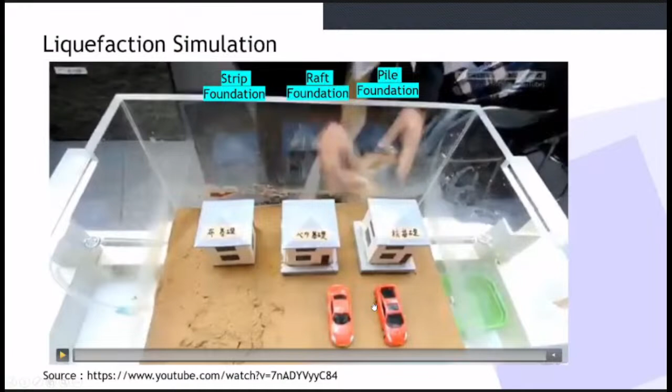So in this video, there is an experiment, a simulation of liquefaction made by a professor in Japan. Here he made three simple house models: a house built above a strip foundation, a raft foundation, and a pile foundation. Then during this experiment, he will shake the soil. This is loose granular soil that is saturated. Then he simulates the earthquake.

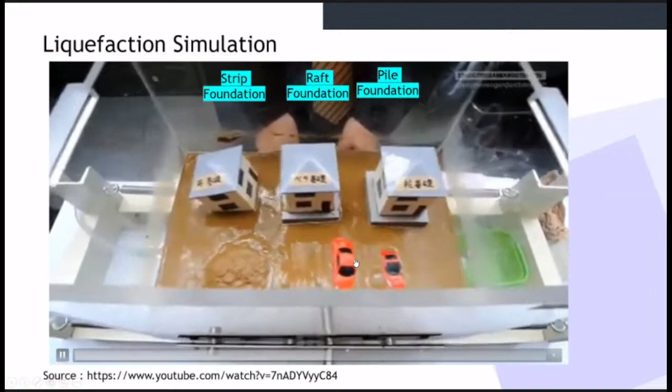As you can see, at the beginning of the earthquake it seems like nothing happened. It's okay, but suddenly at some point when the earthquake is strong enough, the soil will suddenly liquefy, and some of the objects can sink into the ground like this. And for the house that is not properly built with a strong foundation, damage will occur in the house like this. This is the phenomenon known as liquefaction.

Then when the water comes out, the granular particles will rearrange themselves to a denser state like this. So the granular soil, when an earthquake happens, will get loose first, and then it will get closer together. So there will be some settlement at the surface and water will flow to the surface. Liquefaction can be identified in several forms.

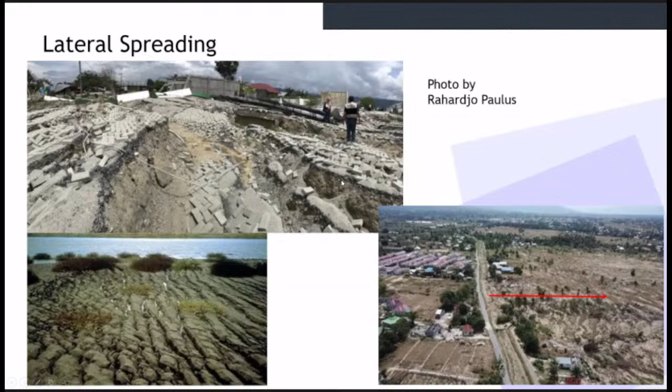And also in sloped areas, when liquefaction happens, it could cause something like lateral spreading like this, or flow liquefaction like what happened in Palu Donggala.

So after we talk about what liquefaction is, when we have a project, whether it's a structural or infrastructure project, we need to evaluate our project. Then from certain criteria, we can determine whether this soil is prone to liquefaction or whether the soil is not liquefiable during the earthquake. There are 4 criteria that need to be fulfilled in order for us to say that this soil is liquefiable. If one of these criteria is not met, then the soil is not liquefiable.

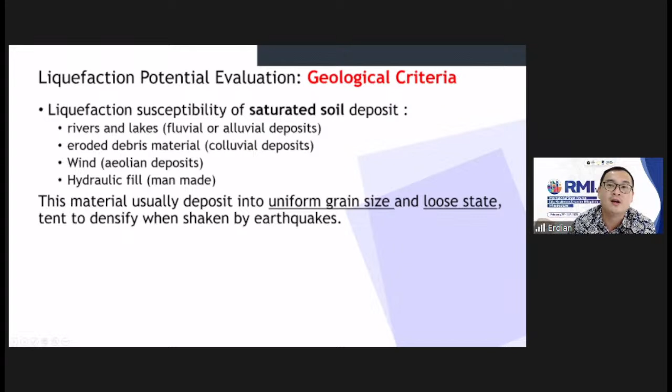With this method, when we check the filling point, the filling point will tend to have a larger particle size, because during hydraulic fill, the large particles are heavy so they deposit first, and the smallest particles flow away. So with hydraulic fill, usually we first have a uniform grain size, because particles of the same size deposit around the same area, and then the soil deposits in a loose state, because when it deposits it has water in it and it is not compacted. So this type of soil fulfills the geological criteria for being prone to liquefaction.

The third criteria is the compositional criteria. From this, we can plot the grain size distribution of our soil to check whether it's within the boundary of most liquefiable soil or within the boundary of potentially liquefiable soil. Usually when people talk about liquefaction, they say that only sand, saturated sand, will liquefy.

However, if we check these compositional criteria, we can say that actually silt also is liquefiable. So when we have a saturated silt in the project, we need to be careful and find whether the silt is really prone to liquefaction or not.

And the last criteria, the one we will talk about most, is the state criteria. This is one of the criteria that we can modify, we can engineer it, so we can design something to make our project not liquefiable. In the state criteria, basically it's like this. There are two things we need to check during an earthquake.

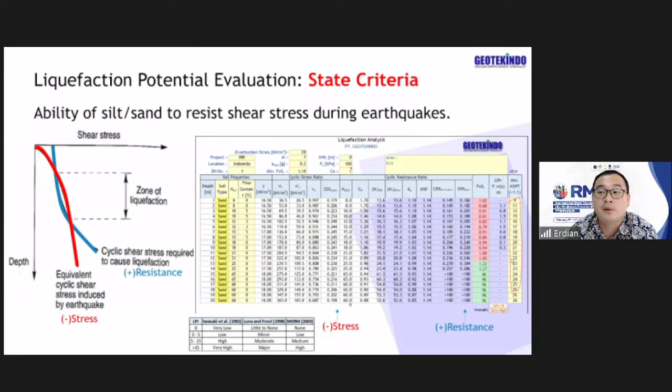So after discussing the CRR, we will jump into soil improvement now. Soil improvement for liquefaction mitigation can be categorized into three criteria. First, we can increase the soil resistance, so we are increasing the CRR. Or we can reduce the earthquake cyclic stress ratio. So when the earthquake comes, we try to absorb some of the earthquake force, so what is transferred to the soil will be reduced. So we reduce the CSR.

And third, we can provide drainage, so when liquefaction happens, the excess pore water pressure will have a place to dissipate. For example, we make a drain or a stone column to let the excess pore water pressure be released.

There are quite a lot of soil improvement methods, but today we will first focus on the compaction method. In the compaction method, we increase the resistance of soil, so we make our soil stiffer and able to resist more stress during an earthquake. Or we can create something underground like grouting or mixing, so we try to absorb some of the earthquake stress into the mixing material, or we can do some inclusion.

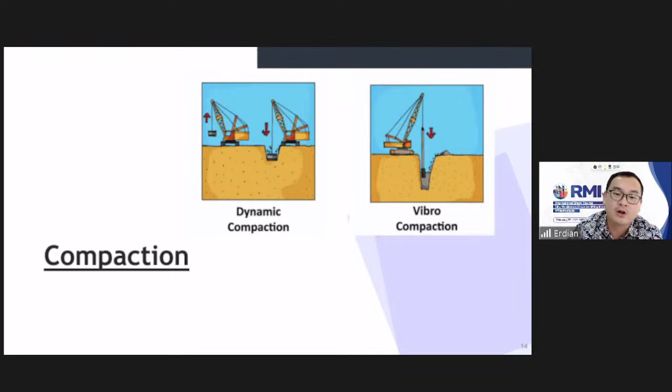First, I want to share about dynamic compaction. So in the compaction method of soil improvement, we have two options to compact the loose granular material. First is with dynamic compaction, and second is with vibro compaction. So in dynamic compaction, what we do is basically like this illustration. We will drop a hammer or a tamper with a certain weight at a certain height. We can calculate it first. Then we will try to compact the soil by dropping the weight like this, by impacting the loose granular soil.

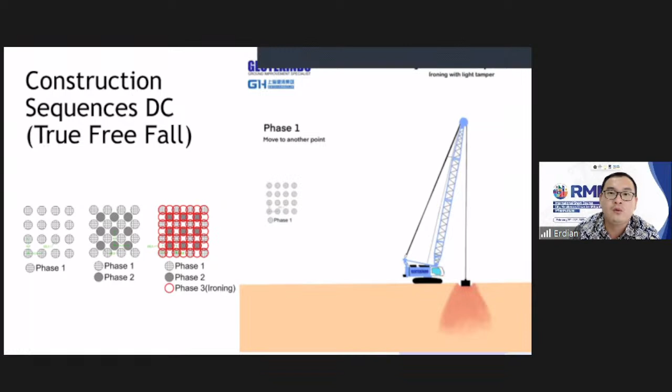Usually this method is very effective when the treatment depth is less than 6 meters. Dynamic compaction has a depth limitation because when we do the tamping like this, the energy will be dissipated. So with a certain height and weight, we can only improve the soil until a certain depth. And in Indonesia, for now, it looks like the effective way is just to improve until 6 or 8 meters with dynamic compaction. If it's more than 6 meters, then we're going to need another method called vibro compaction.

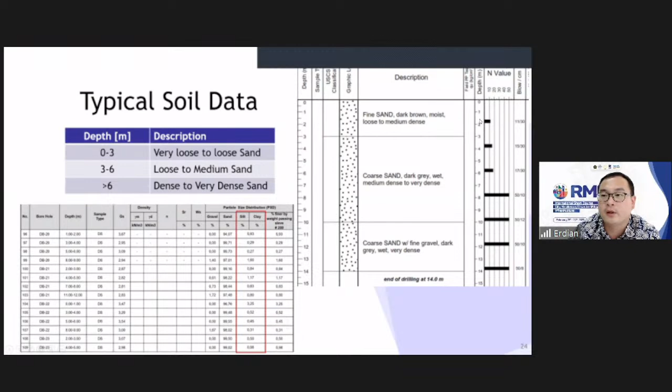This is the photo from the Yogyakarta International Airport project where we did the dynamic compaction. At this project, the soil is a loose sand that is very clean, with a fines content less than 6. So it's very suitable for dynamic compaction, and the loose soil is only at the top 6 meters.

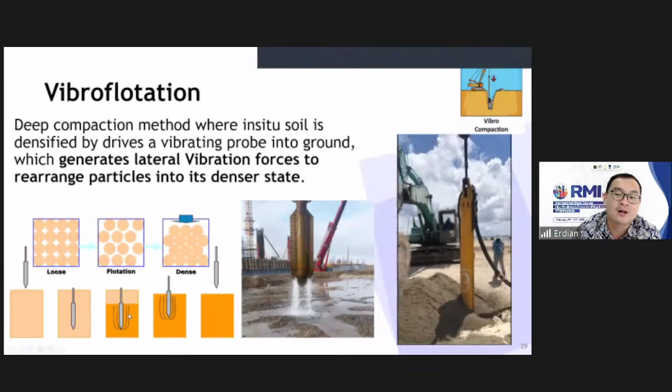Basically, the vibro flotation method is like this. We have a vibrating tube with water jetting. We will try to vibrate the loose granular material to make it compact. What we do here is actually like creating a small and controlled liquefaction. We try to vibrate the granular material. We are jetting some water to increase the excess pore water pressure. So when we lift the probe, it will be compacted. This method can improve soil with depth more than 6 meters, obviously.

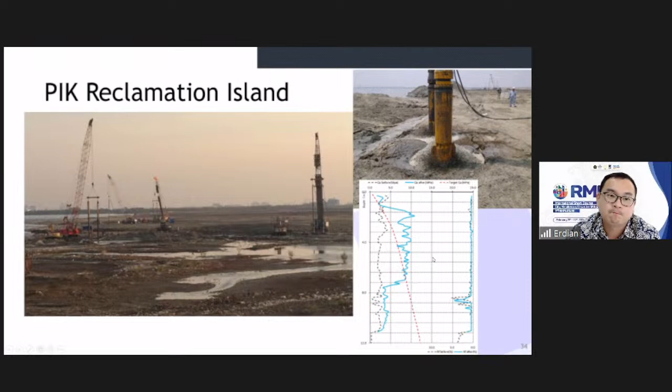This is some photo of our project using the vibro flotation method. Same with the dynamic compaction, usually they will calculate first the minimum criteria for the qc and SPT. Before we do the improvement, we will check with the CPT, and after improvement, we will check also with another CPT. One of the projects using this method is the extension of the apron in Ngurah Rai International Airport.

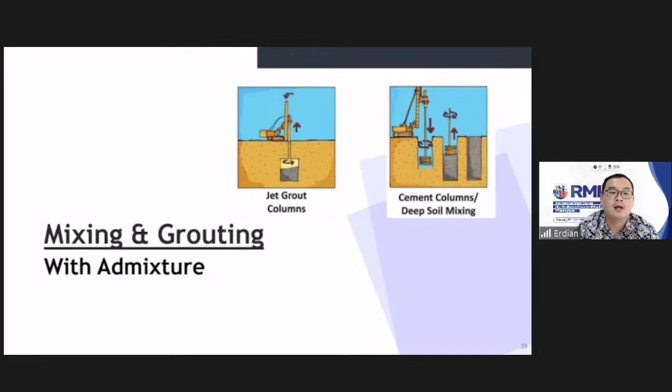Okay, the next method we want to share here is mixing and grouting. So when liquefaction happens, we can try to absorb the shear stress by creating something underground. That something can be in the form of piles or in the form of deep mixing in this case. Deep mixing can be created with a mechanical auger. We call it deep cement mixing or deep soil mixing. Or we can mix the soil using jetting power. Usually this method is called jet grouting. This is a more common and typical method, maybe well known.

For the deep cement mixing, we can create a lot of patterns because of the installation method. And the most typical pattern for liquefaction mitigation is the box, because when we confine the loose granular material in a box, when liquefaction happens, the soil will be trapped inside this box, and the liquefaction will be easier to control.

Okay, deep mixing method is constructed like this. Basically, we will have an equipment with a mixing auger underneath, and we will mix the soil with the auger. First, we blend the in situ soil, and then when it reaches penetration depth, we pump a cement slurry. Then we mix it while pulling up the auger.

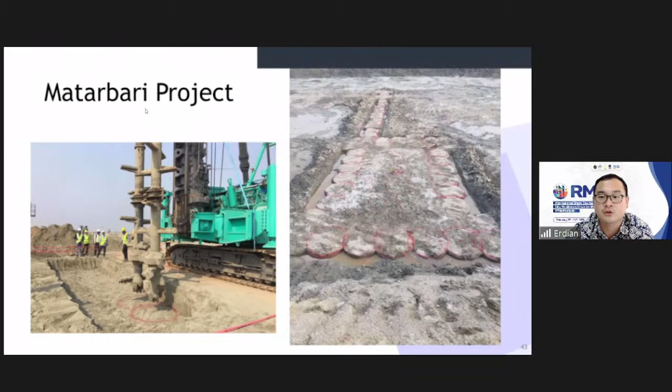And this is the arrangement of deep cement mixing. They have tried to calculate and design several patterns, and to optimize the design in the middle part where they didn't need much force, they can make the replacement ratio less.

Okay, when we are designing for liquefaction using the reduction of CSR method, with the same analysis we can specify and design our pile, then determine the shear modulus of our material. Then from here, there is a formula from Baez. We can calculate the new CSR value. Basically, the new CSR value will be less than the previous value. Then after that, we can determine the new factor of safety.

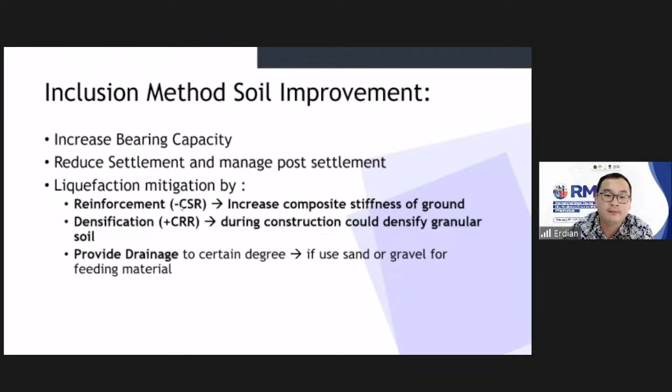Okay, in inclusion method, to create stone column, we have a lot of options and construction methods. Here I highlight some methods suitable for a project with liquefaction. For example, vibro replacement. This is actually the same equipment as the vibro flotation I showed earlier. However, during installation, we feed gravel from above. When we vibrate, the gravel will be compacted, and at the end of construction we will have a stone column. This is the vibro replacement method to create stone column.

Or we can do the compaction column, where there is a top mounted vibrator. In this method, we compact the stone column by vibrating it up and down, like a driven pile. Basically, we push down the stone column. This will also create vibration, and the soil between stone columns will also be compacted.

And the last method is called deep dynamic compaction. The equipment is almost the same as dynamic compaction. However, when we do the tamping, we build a well. We fill it with gravel, then we compact by dropping a hammer into the well.

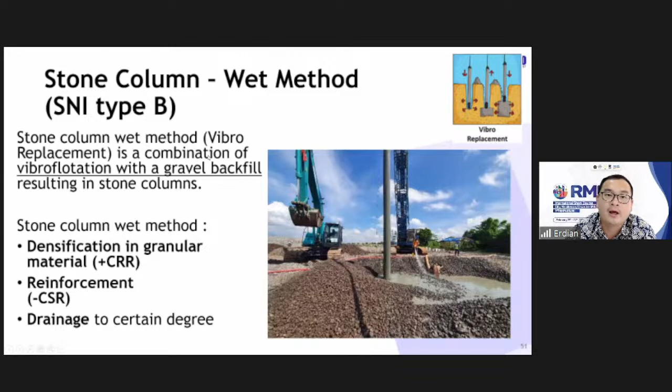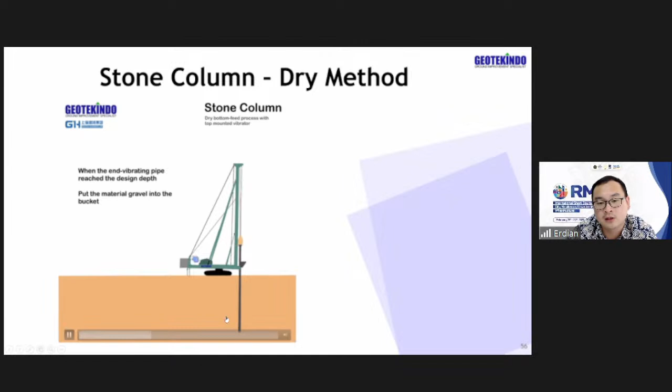Then during the installation, it will look like this. This is the vibro hammer. At the end, it has a one-way valve, meaning that when we do the penetration with this tube, the soil cannot get in. However, when we lift the probe, the gravel will discharge from the end of this tube. So first we will vibrate and insert the tube. During the installation, the area around the stone column will also be vibrated and compacted.

Then we will fill the gravel into the tube. Then when we pull out the tube, some of the gravel will be discharged, and then we can repenetrate the stone column to make the gravel compacted. Then we can repeat this step over and over again until we reach the design depth. This is the dry method stone column. One of our projects that is using this is in Doho Kediri. Yeah, this is the stone column.

Or in the Soekarno-Hatta International Airport, we also have stone columns there for the sand layer at the top part, 8 meters. I want to show here one of our trial installations in Soekarno-Hatta. At that time, we did the trial with an arrangement of 3 columns like this: 1, 2, 3. Before the installation, we tested in the middle with the CPT and SPT. And after the installation, we repeated again at the same point.

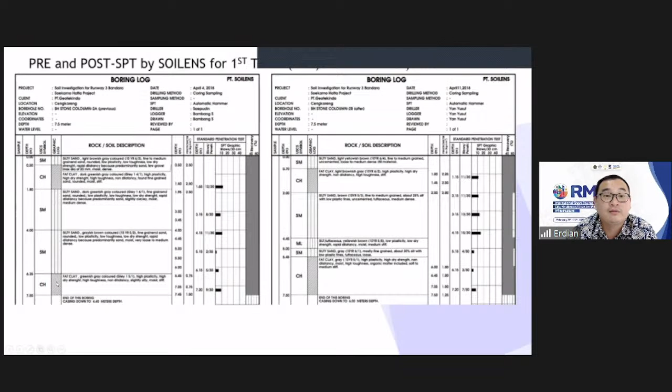Around the same point, we do the CPT and SPT to check whether the properties of the sand at the farthest point have increased due to the installation process. And here is the result. Okay, on the left side is the SPT before, and on the right side is the SPT after. For the soil layers, you can see here we have sand, clay, another sand, another clay. So if I make a summary, this is the value before improvement,

and this is the value after improvement. We can see clearly here that for the clay, the SPT value almost didn't change. The fat clay below also. However, for the sandy layer, the SPT value has increased, meaning that the granular soil has been compacted during the installation process. The same was observed using the CPTu data. You can see before and after improvement, there is an increment of cone resistance.

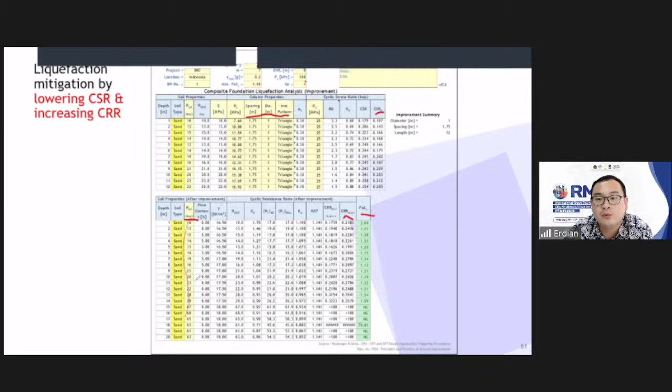When we are doing the design of stone columns for liquefaction mitigation, the first thing is the same as with DCM. We can design the stone column. We input the shear modulus of the stone column. Then we can reduce the cyclic stress ratio. But due to the increment of SPT value, we can now change the SPT to the improved value, and then we can get the increment of resistance. So we can get these two values.

However, the limitation of the stone column method is that the shear modulus of gravel will obviously be less than that of concrete or deep cement mixing material. The last is about stone columns using the drainage approach to mitigate liquefaction. Basically, I will not go deep into this topic. I took this presentation from Professor Juan Pestana.

Basically, the concept is that when we calculate the stone column for liquefaction mitigation using the drainage approach, we need to do dynamic analysis in software. Usually with finite element or other software, we try to create the cycles of the earthquake. We simulate it in the software. Then we check the excess pore water pressure ratio. Then we limit the pore pressure ratio to a certain value.

So the approach is that when you have a stone column or a drain during an earthquake, the excess pore water pressure will be generated due to the earthquake and will also dissipate at the same time because we have drainage in the stone column, and we can get this kind of value.

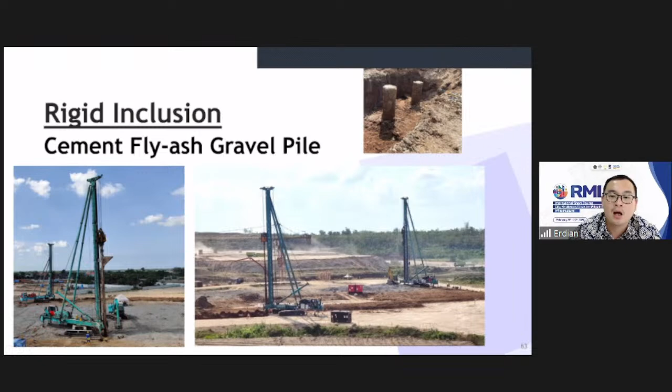The last method I want to share here for soil improvement is rigid inclusion. This method actually looks a lot like the stone column method. You can notice that the equipment is actually the same. The only difference is that instead of feeding this material with stone, we will fill this tube with low-grade concrete.

So, same installation method. However, if we are able to use concrete as the feeding material, the shear modulus of concrete will be much stiffer compared with the stone column. This means that when the earthquake comes, it can theoretically absorb more of the earthquake force. This method is known by a lot of names out there, but basically it is the same method, usually called rigid inclusion.

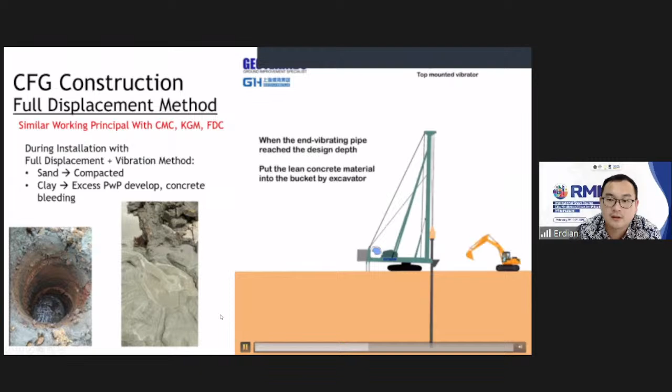Yeah. For feeding with concrete, we have two options actually. Besides using the vibrating tube like this one, we also can use continuous flight auger or CFA. So in this method, we will do the installation by first using the long screw. We will screw the soil. Then after it reaches the design depth, we will slowly pull the screw up while pumping the concrete.

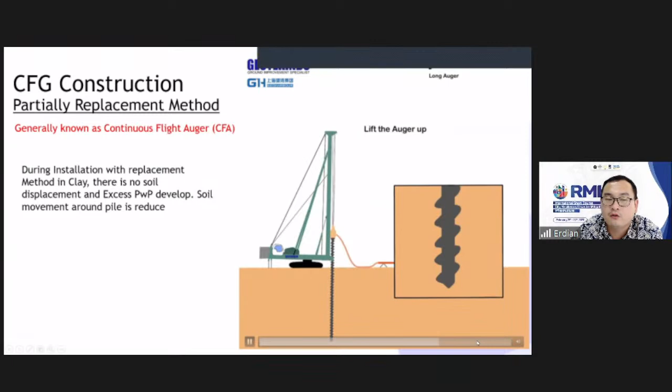For rigid inclusion, even though it looks like a pile, this has a very distinguished behavior from a pile. And usually for rigid inclusion, we don't put any reinforcement. So this is just a low grade or medium grade concrete without any reinforcement.

Yeah, this is the end product of the rigid inclusion. So you can see this column is a lot stiffer compared with the stone column or even with the deep cement column. We can test the column to check the elastic modulus and etc.

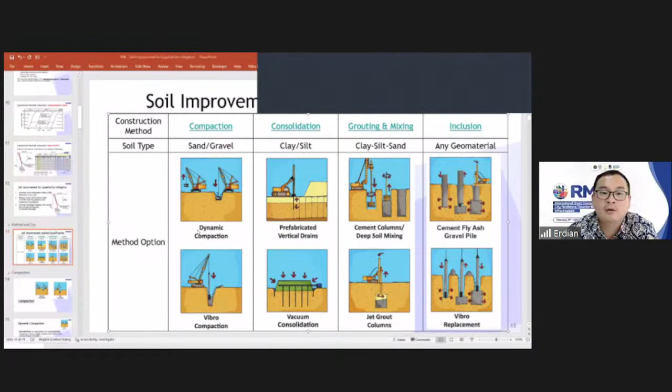For liquefaction mitigation, actually the cheapest method is using dynamic compaction, Pak. Because with this method we don't introduce anything and it's quite simple. We just drop and tamp the granular soil with a certain height and weight. However, this method has a limitation of the improvement depth and the kind of soil. These two methods are only applicable if the granular material has a fine content less than around 12%. If the fine content is too high, then this method will not be able to compact the soil to a certain required SPT or QC. So when that happens, we cannot use this method. Then we move to the next method like deep cement mixing, stone column or rigid inclusion.

Usually the project that needs soil improvement is an infrastructure project. If it's only a structural project, liquefaction can still be managed by designing the correct pile foundation. So when the liquefaction happens, the structure will be safe and will stand through the earthquake. However, like this example, the parking lot or the road may be damaged due to liquefaction. That is why sometimes, besides designing the pile foundation, some owners or government, for infrastructure development, will consider doing soil improvement instead of using piles all over the area. It will be more expensive to use pile foundation in such a case, Pak. I hope that answers your question, Pak.

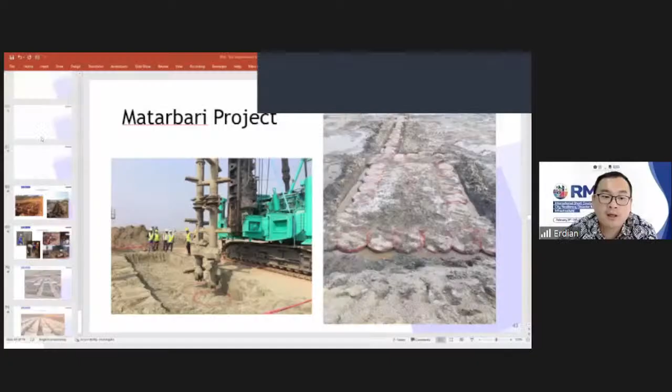Okay. For the final remark in this sharing session, liquefaction is a phenomenon that will happen for most of our projects if we are sitting around a seismically active zone. So we cannot ignore that phenomenon. When we have a project, we need to assess it, and then determine whether the project needs something done or we can really ignore the potential hazard of liquefaction. For the improvement, there are a lot of options to ensure the safety of the structures that we as civil engineers build. That is our closing remark for this sharing session.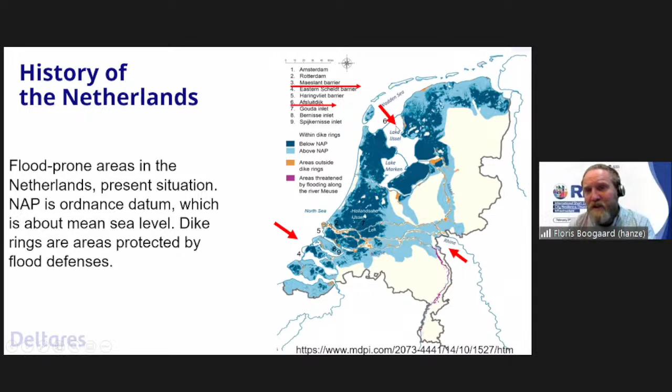And one of them is the Afsluitdijk, we call it. It's basically a dike that made a part of the sea into a lake. Show this again. So this part is the Afsluitdijk. So this was all sea, and a lot of flooding was around when the sea came in. So we made this into a dike, also a connection from Holland to Friesland. And that was actually constructed already in 1927.

So that's a major construction of 32 kilometers of dike closing the sea, which still is one of the engineering high points around the world, so to say. And this is how it looks now. And it should stop these floodings, as you can see here, in 1916.

So another year, what was a disaster for the Netherlands, 1953. Dikes broke in Zeeland, which is in the south. You can see here a lot of dikes broke. Almost 2,000 people were killed. The sea coming in, of course, drowning a lot of people. So it was devastating.

After that time, the Delta Works came in, and that Delta Works is a picture that you can see now. We closed basically a lot of things from the sea. A long time span, as you can see. It took about 50 years to do that. It's a lot of cost, a lot of planning, of course. And one of the highlights is maybe the Maeslant barrier.

If you have been to the Netherlands, interested in water, you probably saw this. It's a lot of steel, as you can see. It's with doors like 210 meters wide, so it's really a mega structure. I think it's more impressive than the Eiffel Tower in Paris, but don't tell it. And at every slide, if you want to have more, there's some information too.

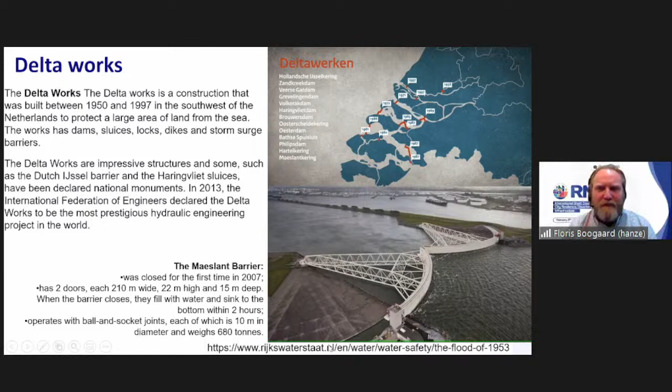So, are we safe with that from the sea? Well, actually not, because in recent years, 2 years ago, we had floodings in the south. Rivers in Germany and Belgium went flooding a lot of cities. There was high precipitation, over 100 millimeters a day, and that is how it looked in July. This is from Germany, but also in the Netherlands.

You can see that there's a lot of devastation, and of course, a lot of questions: are we safe? Every part of the Netherlands can flood, as you can see now. So even in recent times, what I'm telling is it's very important to be safe from water, as you will relate to, of course, in Asia.

The Delta program is not a program that was finished after the Delta Works. We saw, as I show now in the recent pictures, and of course there are more examples, extreme rainfall, floods, but also heat waves, climate change with higher temperatures, but also periods of drought and sea level rise for the future, and also urbanization, which will have devastating effects on our little country, and we should deal with it.

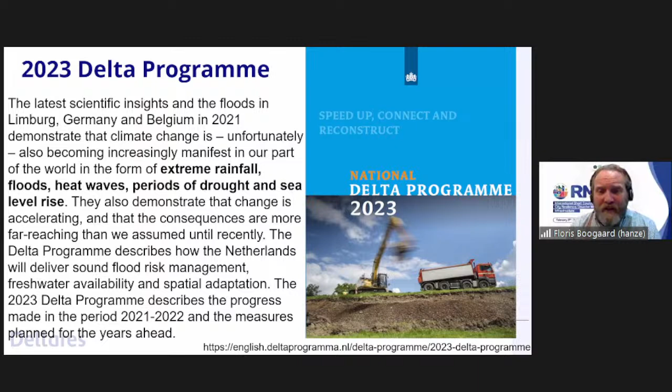And how we deal with that, what kind of strategy is in the Delta program, you can see here. Because the IPCC report also makes great graphics. It's about floods, heat, drought, nature. Also, of course, biodiversity declines a lot in cities. That can be a problem for our food production. There are so many challenges that we have to relate to in the urban dense area.

We don't have a lot of space. We don't have a lot of budget. So there's a lot of things that we need to be doing. Then there's a lot of excuses not to, actually. But some of the disasters that I showed will show you the momentum that a lot of action has been occurring. So just a little closer look at the problems before jumping to measures.

I'm sorry, Floris. Yes. Yeah, I think there's some problem with your voice, because we can't clearly get your information. Can we play the video too? Yes, if that is easier for you. Or is it better now? Yeah, it's better now. Oh, shall we try that? Maybe my long beard was in the way. Okay, I'll try. If not, feel free to interact and we show the video. Yeah, okay. We'll try to play your video. Thank you, Floris. Okay, no worries. I will stop sharing.

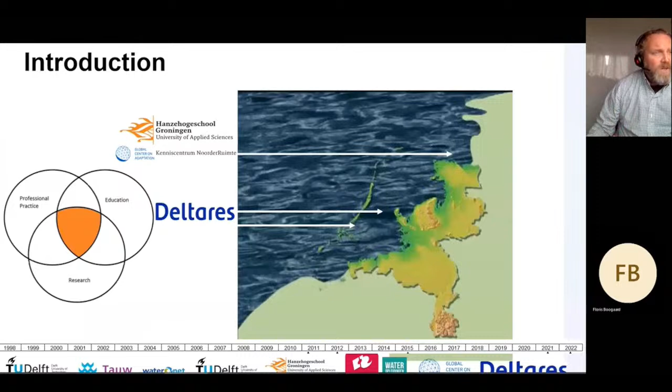So, if the dikes would break in the Netherlands, I would be underwater, as you can see here in this slide. A large part of the people live in the western part, and this will be flooded, as you can see here in this picture. At Deltares Research Institute, we do a lot of flood management. It's about sinking cities, surface and water quality, subsurface, soil, water, and good fresh water supplies, for example, elements about the environment and the infrastructure that we need in our cities and that should be safe.

I'm also a professor, as I mentioned, at an Applied University. So a lot of projects that I will show you are about applied sciences. I just put this in so that if you want more information, you can find it. My research group does a lot of projects around the world. And then the GCA, Global Center on Adaptation, is about solution brokering of different nature-based solutions, or whatever can help us fight climate change.

And what you can see here is the first conclusion as well. It's really broad. It could be cities, could be rural areas. It's about locally led action, but also about water, disasters, finance. Of course, we need money, we need space. So it's a very complex world. I'm really about solutions, not about problems. We're going to talk about both.

This is the headquarters of the Global Center on Adaptation in Rotterdam. It's a floating office with a green roof. It also has solar panels on top, so it's really an inclusive mitigation and adaptation strategy. And there's a lot of things you can find, like the floating pavilion. But tomorrow Rutger de Graaf will talk about floating urbanization, so I'm not going to push that. But there's a lot of solutions that you can find.

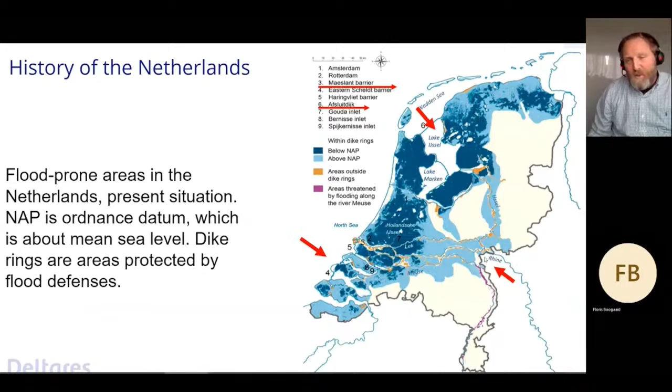Another year which was very disastrous in the Netherlands was 1953. Big dike breaks in the whole of Zeeland. Almost 2,000 people died in this storm event. Dikes broke, as you can see here. We just remembered this event, being quite close in history still, because it changed the Netherlands.

Because of these disasters, the Delta Works came after. We have barriers, as you can see here, large ones that we can close. It's quite an impressive structure, as you can see here. But there are structures all around to protect the Netherlands. You can see here in different years. That hasn't been done overnight, as you can see. In different years, we built a lot of defenses against the sea.

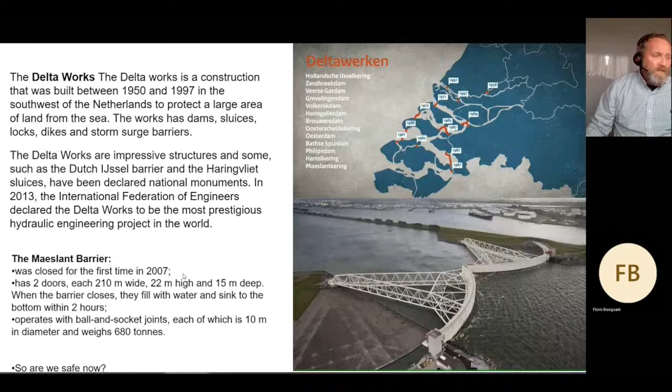And we are safe for now. We think we're not even in the top 100 of most dangerous cities. But then, are we safe now with this Afsluitdijk and the Delta Works here? Well, not entirely. 2 years ago, we had severe floodings in this region, which you don't expect. But heavy rainfall can come down everywhere, as you can see here in the next pictures as well. Not only in the Netherlands, Belgium and Germany as well.

Heavy rainfall. Locally more than 100 millimeters in a day, so you can see this devastation in this slide as well. So, just at the beginning, this is all leading up to the Delta Works, but also the Delta program, which is not only about the floods, which it started with, but also the extreme rainfall, which could be anywhere. The heat waves, periods of drought, sea level rise in the future.

We need a plan. And I'm going to talk about these strategies, and mostly also about the extreme rainfall and the floods in cities because of heavy rainfall or heat waves, because that is probably also near to everyone who's listening now. Of course, we don't all have the resources to make these big dams, and we decided to live below sea level. But I think if we rethink it, we might do different things in the cities.

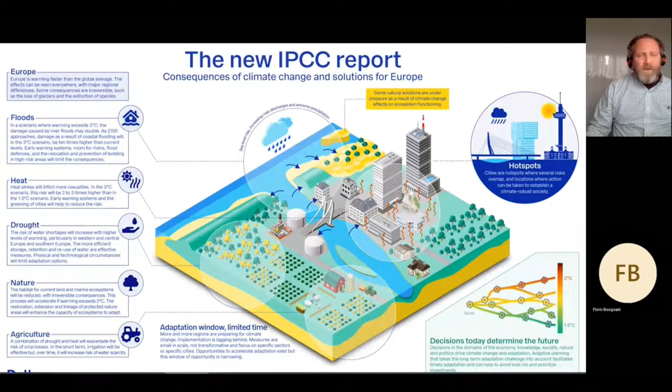So the IPCC report, probably you've heard of it or read it. It's about floods, it's about heat, it's about drought, but it's also about nature and of course our food resources like agriculture. We need to adapt. This is a scheme where everything lines up to see what we have to do, because it's about adaptation, but it's also about mitigation. But first, maybe look at some problems before we jump into different measures. We talk about the Netherlands, but of course I'm talking about the whole world.

We have more droughts, so more fires, for example, or infrastructure which is subsiding. You can see here the ground has subsided at this rate. So a lot of places with a lot of peat in the Netherlands are subsiding about 1 centimeter a year, which happens in other places of the world as well. When you extract groundwater, peat will shrink, oxidize, and then you will get problems.

Other problems with dikes. Actually in 2003, a dike broke not because of too high water, but because of drought. Instability of dikes can occur. So sometimes even in dry periods, we need to wet the dikes to make them more stable. And then some pictures of the heat. Of course, temperature goes up. Global warming, where infrastructure has to be wetted, otherwise bridges don't open. Or sometimes you put salt on asphalt so it won't melt.

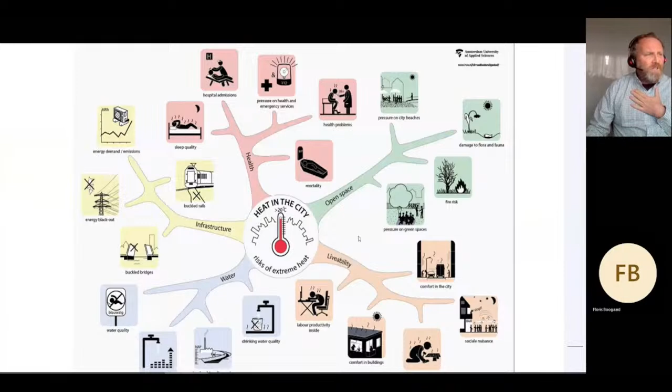And of course, flooding. Drought or heat stress they call snipers. It's sometimes a slow process, but sometimes they really get you in heat waves, for example. And flooding is everywhere.

A lot of damage, as you can see here. High water, of course, all around the world. Some more examples in Amsterdam, for example, where you can see cars like boats through the city, or people, in this case, enjoying an airbed going through the streets. But of course, a lot of vital infrastructure is at risk. As in Amsterdam, this is a train station.

So to sum up, there are quite some challenges that we have. Subsidence, damage to infrastructure because of drought. We also have sea level rise, of course. We have floodings, water quality deterioration. We have droughts. So there's a lot going on in cities that we all need to address. It's not only about the water coming from the sea, where I started.

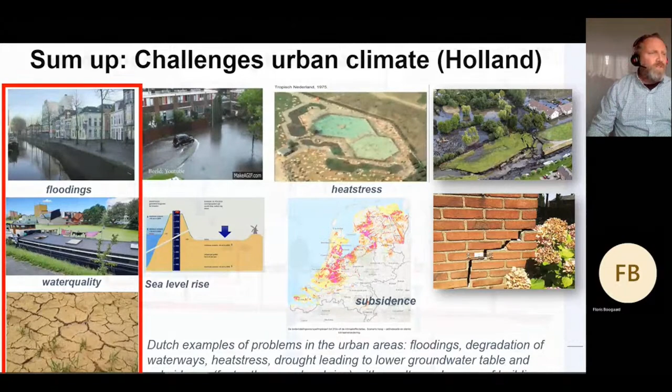Because the whole weather pattern is changing. We have built a city. We have more runoff because we have more pavement. We have less groundwater recharge, so that could be inducing drought. We have less evapotranspiration because of the runoff and more grey buildings. So things change. And we have a heat island effect. In the middle of the city, it could be some degrees warmer than outside, and some degrees warmer could be the difference between livability or unlivability or even death.

And then the Netherlands, it's a small country, but it's really diverse. We have peatlands, that's mostly where the subsidence is, as in a lot of regions in the world. We have saltwater intrusion. We're below sea level. So if you pump a lot of water out, the saltwater will come in, affecting our agriculture. We have a lot of urbanization, so a lot of urban areas popping up, you could say. And we also have sea level rise in the future. So there's a lot going on, as you can see.

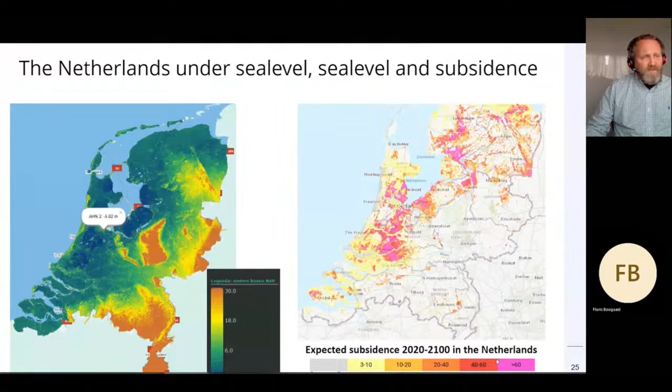Sea level. This is under sea level, as you can see. This is the subsidence. It could go up to 60 centimeters in 100 years or even more at some locations. So that's really something to take care of. This is faster than sea level rise, for example. You can see that because cities are sinking. Rotterdam is one of them, but basically every city under sea level is affected by subsidence. But also Indonesia and a lot of places have sinking cities.

And there are things that we do about it. Some examples already from Asia. This is in Semarang. For example, in the neighborhood of Semarang. This is the floating pavilion, as we've seen before. This is Rutger, speaking tomorrow. These are floating districts in Amsterdam, for example. So if sea level would rise or dikes would break, these houses would just go up with the tide, so to say.

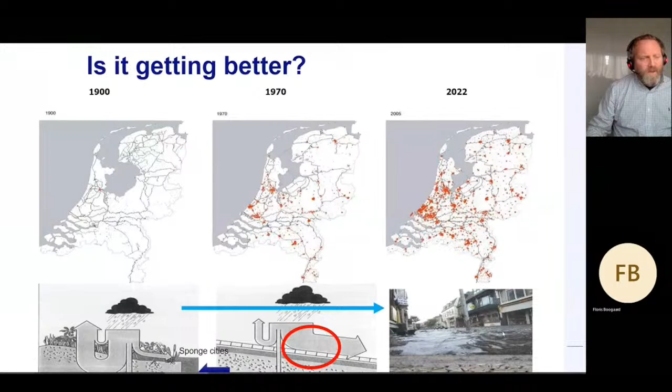But of course, it's difficult to change our habits. And we still have cities, and we live in cultural history, so we're not going to abandon that. And we're going to build more because, in the Netherlands, we have, for example, the refugees, they need houses, so there's a lot of building going on. It changes from natural infiltration and evapotranspiration, basically the climate model in the cities, to more pavement, leading to more water in one place. So it could be flooding and also drought.

And we're not very smart about it sometimes. This is sealed, as you can see. Water cannot infiltrate. Trees don't get a lot of space in cities. They're building, and green has to grasp for sunlight. So that could mean that we maybe have to build in another way, more nature-inclusive, with nature-based solutions in cities. Because in the future, if we're below sea level, do we want to leave? Should we go to Germany or the higher parts of the Netherlands?

Well, first we have to start with planning where we should build. Some places are very low, almost 7 meters below sea level, or we have gas mining in the north with tremors, earthquakes, so to say, which ask for no buildings. These are the rivers. You see Limburg, major floodings. Maybe we should do something else and not live close to the rivers. So there's a lot of debate on where we should build, because we have to choose the right locations to do so.

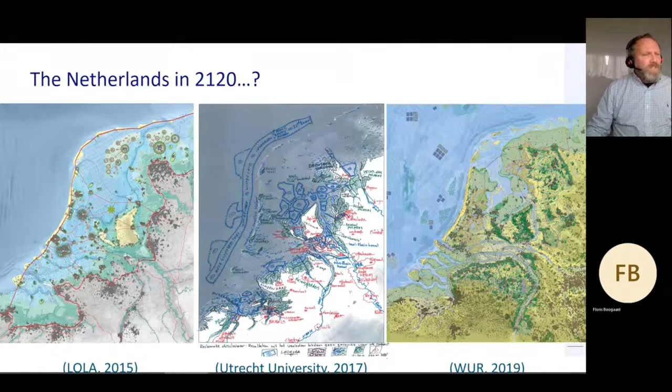So how will the Netherlands look in 50 years or 100 years? And there, as you can see, there are different visions from different organizations. Maybe we should go more floating, maybe we should retreat, maybe we should do things totally different, or even build more in the sea. There's a lot of debate about it. But still, until that time, we should be smart, making smart cities.

Maybe not have green in one spot, because that will not do a lot for infiltration in other places compared to areas which are totally green. That green line here and gray: we should have more room for green, and see if we can make this a more nature-inclusive city. Because there are different kinds of cities all around the world, of course, and some have totally no access to water supply or sanitation. Some we call developed, but you could debate that as well.

But basically have more natural cities with natural infiltration or evapotranspiration, for example. We have drained cities that are really about getting water out of the city as soon as possible. But it might be smarter to have sponge cities, so to say. I will tell something more about that. But these are schemes, and you might want to have some more information.

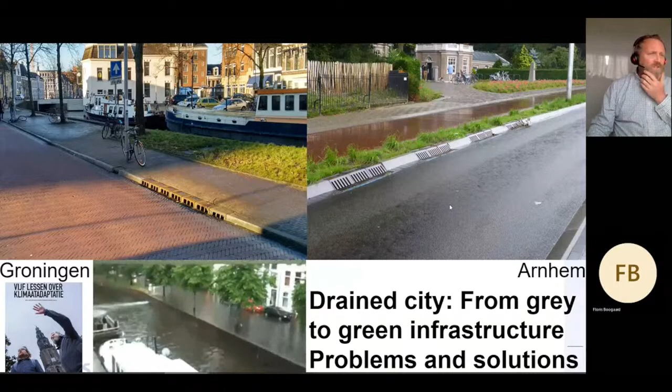These could be considered as drained cities. These gully pots, it's really gray. You have stormwater, sewage; this is flooding in Groningen. You have one pipe that goes to the surface water here, and you can put a lot of gullies there. But this pipe will have the same discharge capacity, so it will induce flooding. Basically like a bathtub, as you can see. So a drained city example.

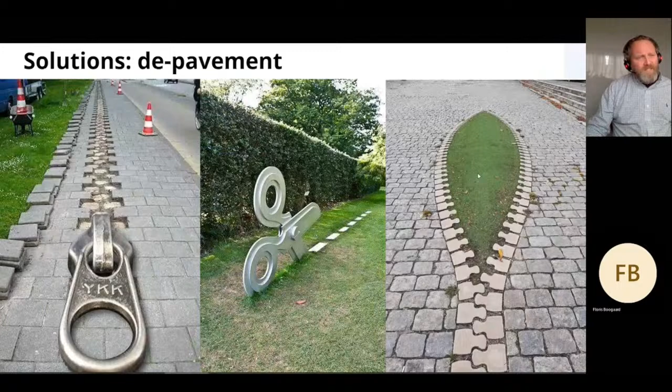Sometimes it's quite simple. So these artists make it more visible. The grass should be open. There could be a bioswale or rain garden. Porous pavement should be made. This is in Sweden. Let green come again in our cities. So here are some examples from around the world. I give you some time to sink that in.

They deliver ecosystem services. They have a lot of benefits. Name some. It could be, of course, biodiversity. It's a solution to fight drought, heat stress, cooling cities down, for example, storing the water. It's about mitigation of floodings, and of course there's more livability. It could even be food production, or insulation so that we use less energy. So there's a lot of reasons why green infrastructure should take over our cities more and more. We have to protect the natural processes which the city had before, and get those processes back. And that needs, of course, a lot of work.

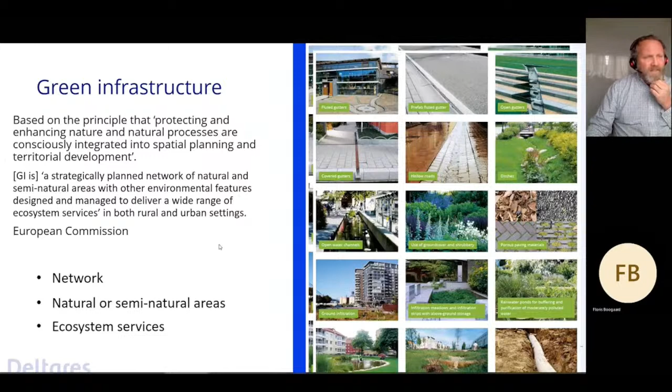In the Netherlands we have already been doing this; I think we started in 1995 with bioswales, so grass fields that are a bit lower. In the beginning there was a lot of resistance. People would think, oh, the malaria mosquito will come back, or there's just a lot of mud. Then we did a lot of research, and we wrote books, because that's what researchers do, and field trips, when a lot of people came over to see some of these first bioswales. And then we even have a Wadistraat; that's how a swale is called in the Netherlands. And that's an example in a lot of countries, in this case Japan and Korea. So we transported a lot of knowledge about green infrastructure already at that time.

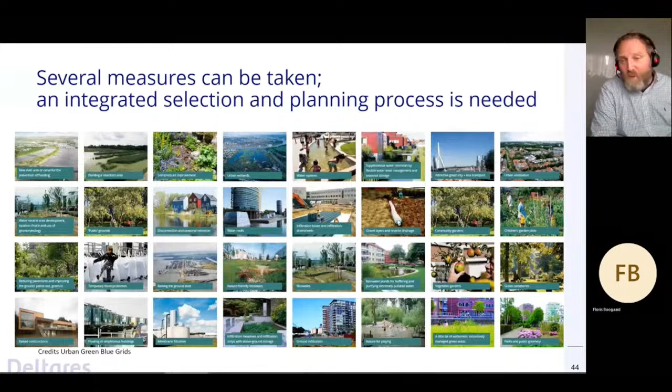So that's one example from the new technologies, which is not that new because it was already out there, but it's new that you put it in the center of urban cities. There are a lot of examples, and I'm not going to show them all. We should see what makes sense for you in your situation, and that will be my task, to give you some tools where you can find these. Because there are so many measures, over 100, which you can find in models and tools, and you just have to know about them, because if you don't know it, you cannot apply it. One of those tools I'm going to talk about later is Climate Scan. It has over 5,000 projects in the Netherlands that we can learn from.

I do a lot of measurements also about these greening cities, and put up guidelines that could be useful for you. But most importantly, every city is different. We need a strategy, and a strategy is analyzing your area. It's finding your ambition. That's different wherever you are, even in cities in the Netherlands, but also, of course, on the world scale. And we have to come to action, and that's not that simple, because action is what you want, but there's a lot of policy and legislation and things that you need to come by with.

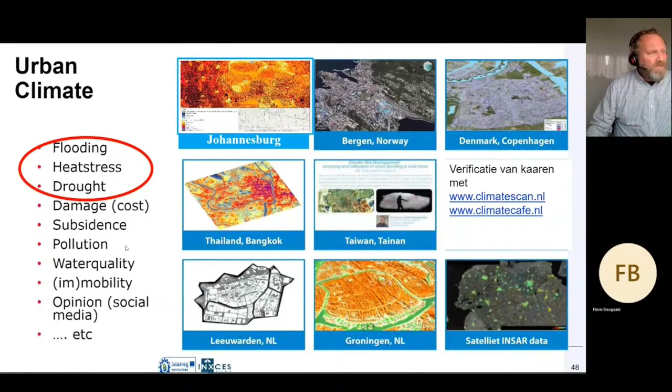Because if you see a city, it's about buildings, it's about open spaces like squares, it's about roads, it's about green. And you can do a lot by buildings. I showed you already some examples. Buildings could be green roofs, blue roofs, could be green walls. Squares could be water squares, which we'll show you later. Roads could be water storage as well. Roads could be floating roads, for example. And parks could be a major asset to fight climate change in cities.

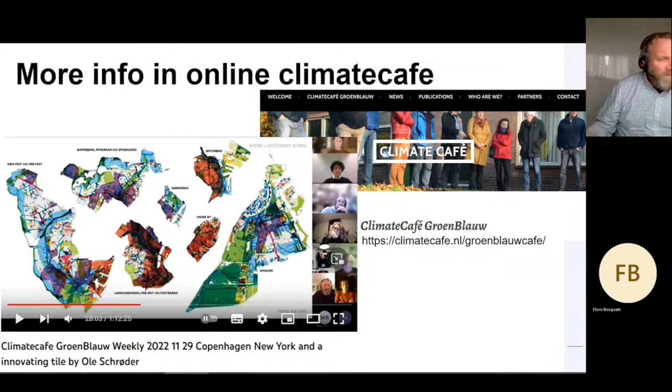And sometimes I put here these links. So if you want more information, you can find that on online climate cafes that we do with several people around the world, interviewing them and seeing what made sense for them, how they would cope with different approaches.

So, co-benefits from blue-green: it's not only about mitigation, also about adaptation. And of course, it's about green, water reservations, about urban greening, which does a lot for both. Lower temperatures. And also we are already too late, so adaptation we have to do. So there's less energy use, for example, with greening of cities. Maybe it's nice to show some examples.

This is a lake where they put floating solar panels. It's 24 hectares, the largest outside of Asia, in Groningen, in the Netherlands. And it looks like this. If it's too dry or too wet, it will just go up with the tide. So that's one example. This is a floating road in China. Cars can pass through, in this case, a nature reserve. But also, if it's too dry or flooding, we can still pass.

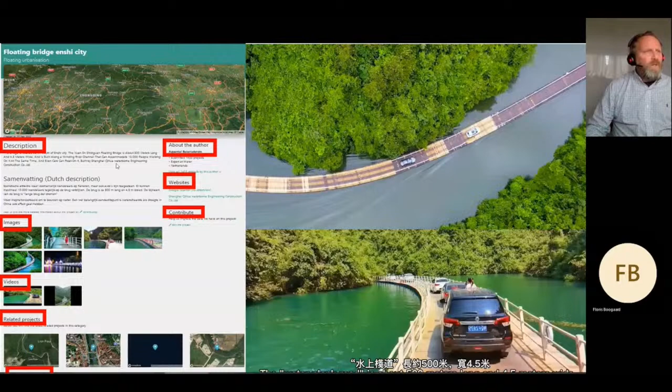And this is not new. It's also near Jakarta. There are different places. And if you want to find it, it's all on Climate Scan. You can find more information there on websites, pictures, videos, and descriptions. I hope you can use this and benefit from that.

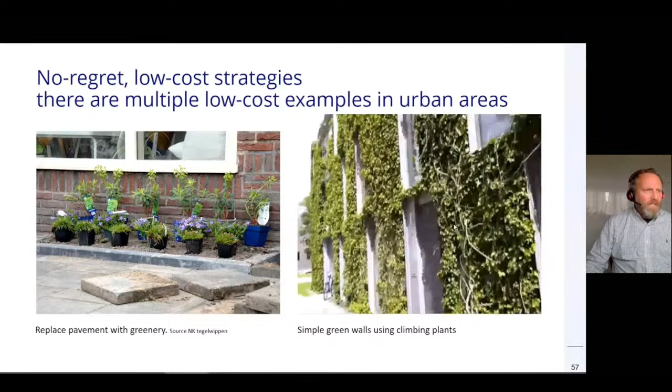It's a hollow road, so the water is actually guided by the road itself, which is an example. So then you can see some green roofs, and the new technology is actually a green roof. You will know there's a solar panel on it, so the efficiency is a bit higher. You can also put plants on it, edible plants, so it's also about food.

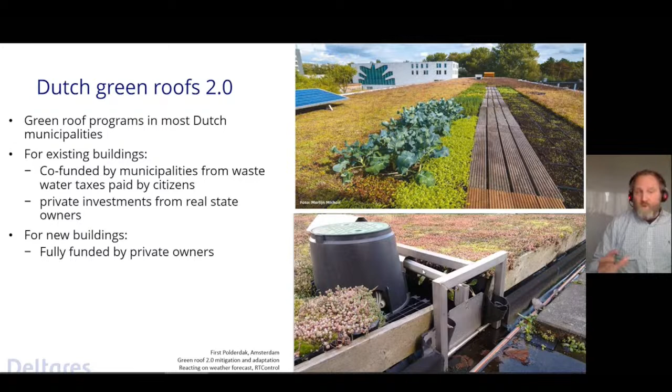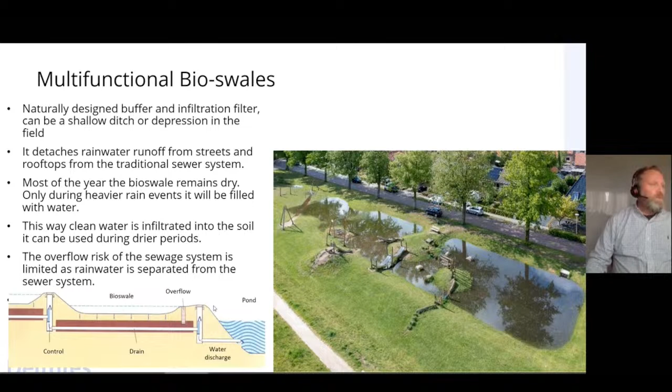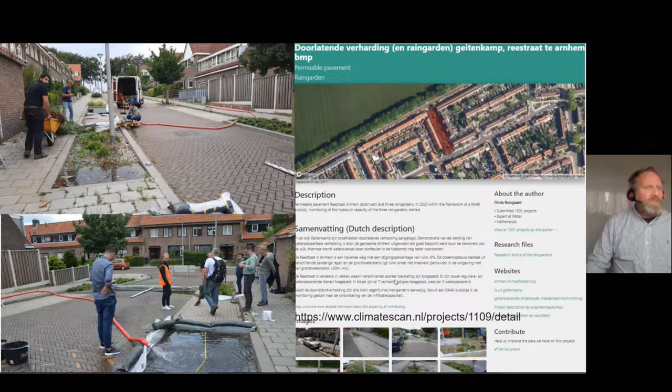So we do a lot of testing, as you can see here. These are some rain gardens in Arnhem. This is permeable pavement, and a lot of research which we can share in guidelines. So, great infrastructure, but of course there are challenges as well, barriers, as you could say. There's some uncertainty about poor performance, which depends on how you design it and how you maintain it. There are a lot of stakeholders. There's different planning than grey infrastructure, for example. The maintenance is quite a thing, and sometimes it costs more.

So these are barriers. But of course, it's also about benefits: financial, environmental, social. So there are a lot of reasons to green, as I showed in the beginning, because green infrastructure is an answer to most of the challenges that I showed before. And I was very happy to see that it's taking over. This is in Jakarta. I'm not sure where exactly, but I found this on the website. It was quite interesting. I would love to do some testing in Jakarta and see what it does for the water balance in this case.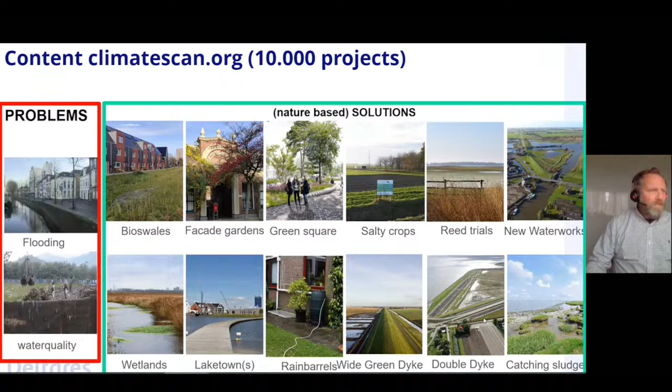It's about water, heat, it's about biodiversity. So you can go around. The floating houses in Semarang are here, or floating airports in Japan, rain gardens all over. The floating roads near Jakarta, you can find them all. So problems, but mostly about solutions. And solutions urban, small scale, but also the bigger picture, as dikes and everything can be seen. Because really, in the Netherlands, but all around the world, everything's changing. So it's greening, at a very slow pace because of money. You have to plan it. People have to agree on it. So it's quite nice.

Well, Climate Scan, maybe just go back. It makes sense to go to a platform which is near you. Asia Pacific gives you a lot of information. Climate Scan is basically global, so it ticks a lot of boxes. What to say in this EU document? There are a lot of platforms, so you can try them all. This is one that you can be involved in yourself. You can put projects on the list.

Contribute to Climate Scan, so you can put projects on there if you like to. You can see it's already a lot more. Show all projects. This is only projects with photos and descriptions. So it's a large database. It's open source, so it's free. It's citizen science, everybody can participate. It's raising awareness. It's interdisciplinary.

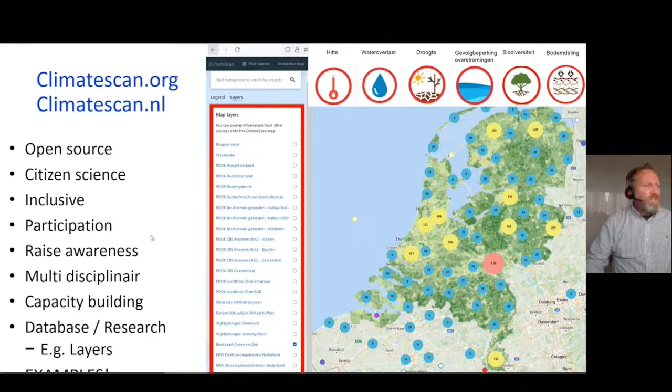In some countries you can put layers to it as well. Like in the Netherlands, we have over 5,000 projects already. You can see what makes sense in green, or is it about biodiversity or drought. So there's a lot that you can add for research as well. And what I like is that citizens put pictures on it as well, citizen science. And then you get these pictures of flooded swales. And sometimes we don't even know if these nature-based solutions work. And I love to see these pictures because this means it stores water, it infiltrates water. So it makes sense that we did it.

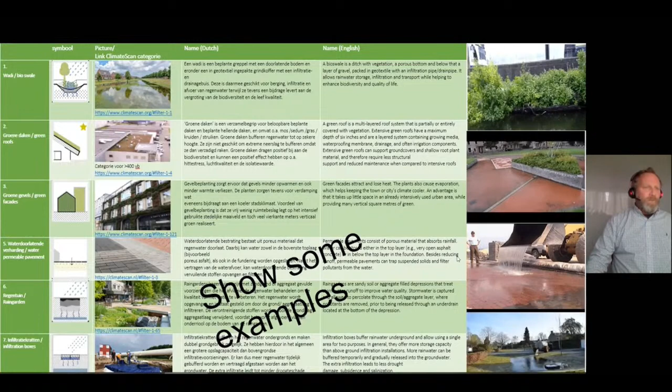Water squares, floating plants, water purification, permeable pavement, bioswales. Name in Dutch, name in English. Bahasa will be added to that as well. Some very famous projects like Bosco Verticale, the vertical forest in Milan, very green. This is my favorite in Belgium. Swales are mostly like ditches. They made it into a soup bowl, as you can see here. So it's amazing. You can sit around here, and still it's open so water could come in, and then you have a filled soup bowl. So nice bioswale.

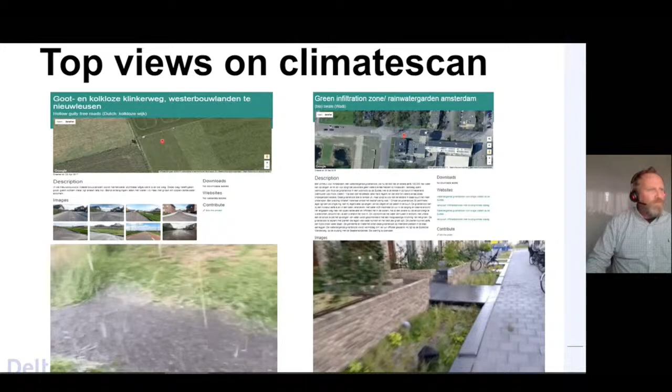These are rain gardens in Amsterdam South. Quite watched a lot, so they're quite popular. And every year we see in Climate Scan what is most used. This year permeable pavement was quite popular. The years before it was rain gardens and bioswales. And the year before it was water squares, so you can see what kind of trends are out there. And these rain gardens are quite popular, especially if you put pictures in it when the water comes in and it just infiltrates and magically disappears. The magic of green infrastructure in cities, you could say.

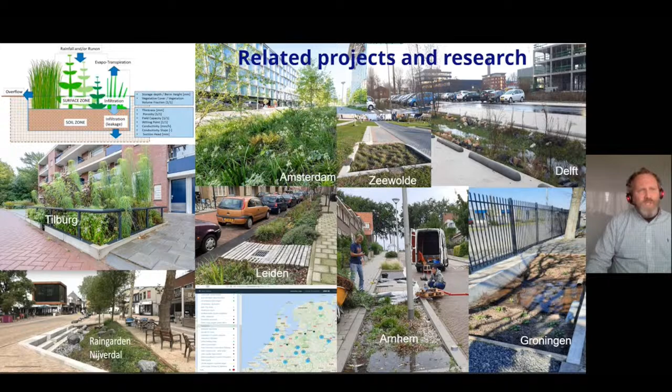Because lately, in the last years in the Netherlands, you could call this a new technology, rain gardens. In the last years multiple were implemented in parking lots so the water would just infiltrate here and there. So it's quite nice. One factor is of course time, the clock. One of the challenges with blue infrastructure, as you can see here. We do a lot of research in drought, for example. If a year is very dry, would it be the same infiltration capacity? Well, it does. Nature can recover quite fast.

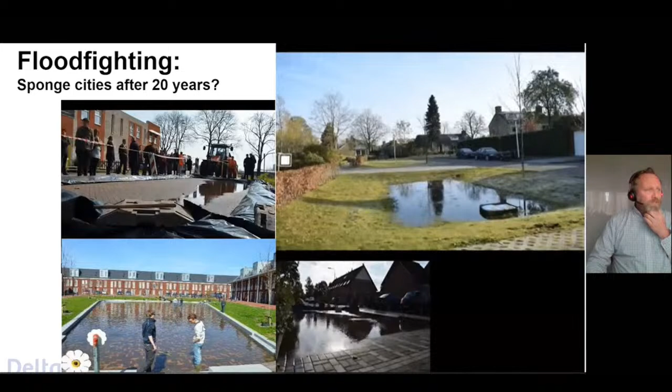This is after a 7-year drought, and a day later it looked like this, and having a good infiltration capacity. Some moving pictures of permeable pavement, water square, bioswales. That research is really helping a lot of people around the world to see.

Mostly we invite classes so they can learn from it. It's about capacity building as well, of also well-trained engineers that really want to see permeable pavement, how it works. In this case, it didn't work that well, so that's a very learning experience as well. And I have great talks with a lot of people around.

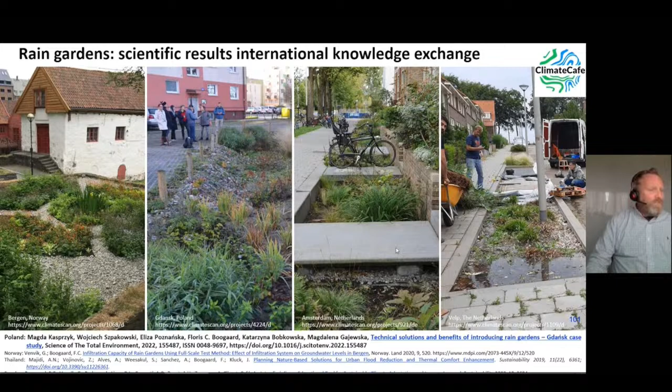So we do research, we calculate the infiltration capacity of these rain gardens. Rain gardens around the world, actually. This is in Bergen, Norway. This is in Gdansk. Of course, in the Netherlands, we do a lot of testing as well. We've been to New Orleans, Vancouver, so there are a lot of places. And it's very important to show that this is very effective. And again, if you want more information, there are some videos that you could use around it.

So know that if you're a researcher, you find this very important. There's research files to it as well. Contact me. There's a lot more information on these locations, because it's not only about hydraulics, of course. It's about user experience. It's about pollution rates as well, biodiversity. General, like how old is it? Where can I find more information?

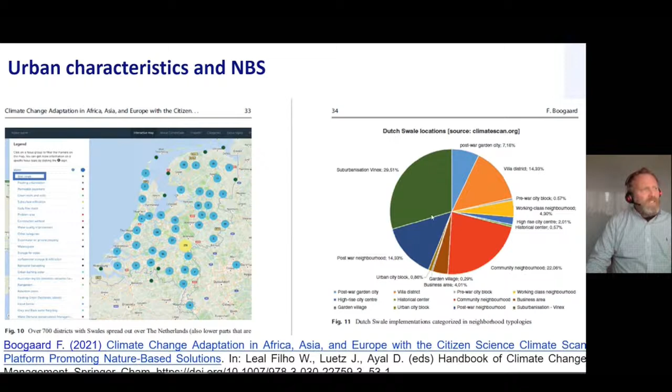So the climate scan is a database. And the database allows you as well to see what can you do in an urban dense area like the center. What can you do in maybe a more newly housed area? So there's a lot that you could learn from, which is quite nice. And also in Asia, Africa, Europe, we did a lot of analyzing of what makes sense. So it's about urban characteristics and NBS.

And every city is different. If you look at Johannesburg, it's really about drought. If you look at Malmo, it's more about green roofs. There's a green roof institute there. Rotterdam is very different than Amsterdam, so you can analyze with climate scan what kind of DNA you have.

And I'm going to skip some parts and maybe show you where you can find also some information in climate cafes from Asia, and finish up there. Because we do climate cafes around the world. Well, what is a climate cafe? I, as a lot of other people, really learn if I see it, if I can be involved. Involve me and I will understand.

So we do climate cafes with triple helix stakeholders, so water authorities, municipalities, but also companies, also a lot of different people, and we go to best management practices and learn about how they function in the field. So this is in Rotterdam, over 100 participants, and that was really about flood and drought and all the challenges that I just mentioned. This was in Malmo.

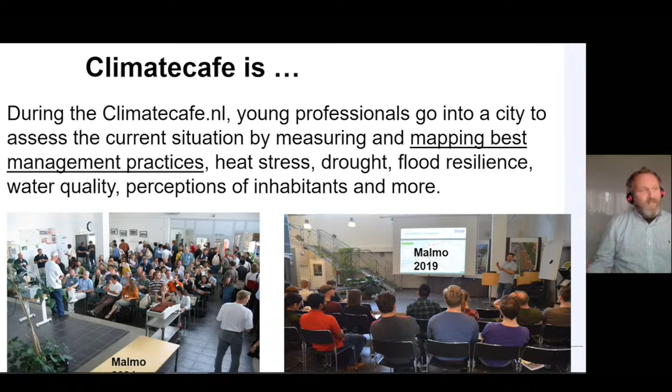It's really about field education and showing them how you can change the climate, and that should be with a lot of enthusiasm. And in the field, green roof, Malmo, bioswale. It's so fun to have classes in the field and seeing what you have to do, because then you can replicate and see what's out there.

Climate cafes are not fixed. We did them in Asia as well. So sometimes about floating urbanization. It's about water quality, but mostly about climate challenges. It has to have tangible outputs. So we really make floating islands, for example.

It should be interdisciplinary, so we learn from each other. It's not only about technical science, but also about social science. International, that's great because you learn from other cultures. It's about storytelling, social, and it's connected to open source tools. And this is one in Canada, Vancouver, a totally different city than other cities. So every time you learn more, and being in the field with all these beautiful stakeholders, it was quite interdisciplinary and fun.

As for water quality in Surabaya, for example, we got on boats and sensors and learned a lot about how the water quality was deteriorated and what you could do about it. So cleaning wetlands, for example. In Semarang, we had a lot of climate cafes interaction. Some pictures here about sinking cities, as I showed before, also about water quality and a lot of pollution.

Does it have impact? Well, some of the climate cafes we published about, this is what you can learn online if you're a researcher and you want to know what the impact is, because every time it's different. But I really hope that sometimes we get more innovation, like these nature-based bus stops, as they call it.

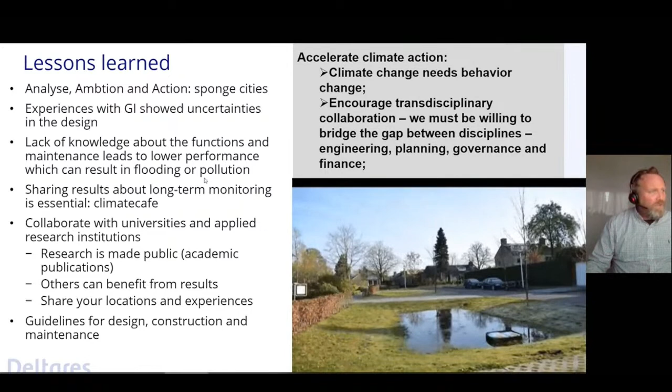So finishing up, lessons learned: analyze ambition and action. I showed you flooding, but it's really about multidisciplinary approaches. We saw there's a lack of knowledge on green infrastructure, so we really have to raise awareness and do capacity building, which we do mostly in climate cafes, for example. So it really needs behavior change, and I hope these examples are inspiring to you, but mostly that you could see how it makes sense to your situation with engineers, planning, governance, finance, cost and space.

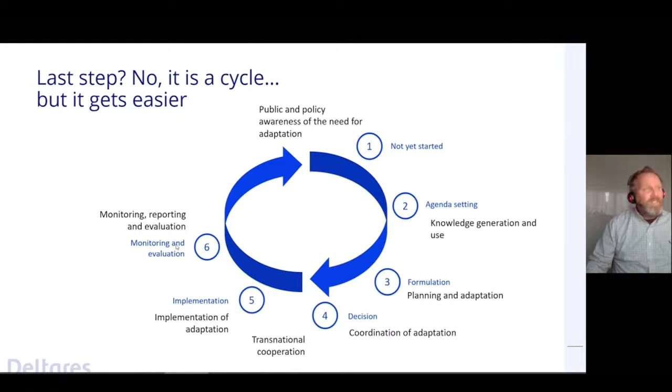So I'm not sure where your city is on this line, but we could leapfrog from mostly drained, flooded cities to more water-sensitive cities, which are an answer to drought, heat stress, biodiversity, and other problems that you have in your situation. And of course, you're never ready. You start here. You have to set the agenda. You have to make decisions. It's about implementation, also monitoring and evaluation, but learn from it, implement what was right for your situation, and start again. So very important.

Now, sum up. We share challenges, so let's share solutions. I hope you contribute to Climate Scan or participate in a climate cafe so we can learn together from these new technologies. And I hope these practical examples of resilient infrastructure are inspiring to you. You know where to find tools and information. You know where to find me. If I can help you, I would certainly help you out.